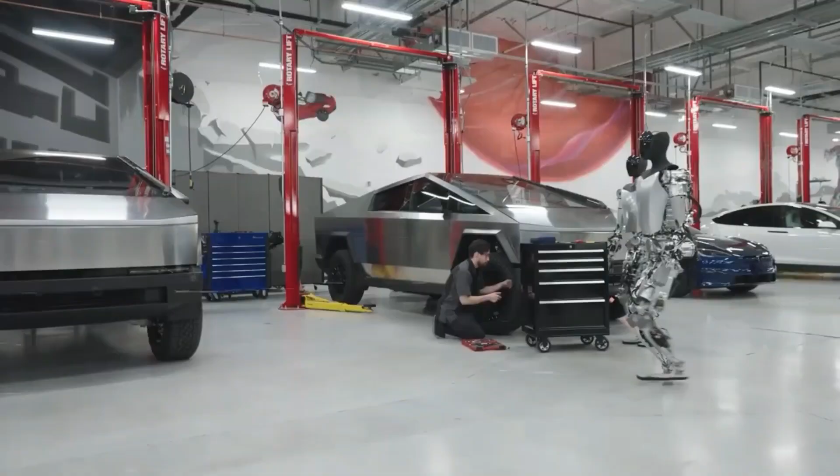But let me just set the stage real quick. You had AI companies dropping the craziest humanoid AI robots that are legit starting to think and learn autonomously. I'm talking Ameca, Optimus, this whole new breed of androids. Then you had big dogs like Boston Dynamics. Oh, and get this, there's even a company that's low-key created a robotic body ready for freaking AGI. It's been that level of crazy, and honestly, it's been wild just trying to keep up with all the major updates and breakthroughs, but don't worry, I got you covered.

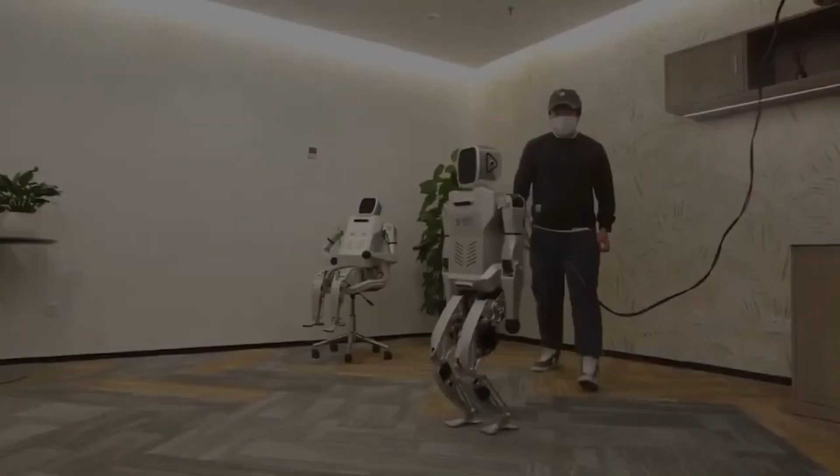In this video, we're gonna take it step by step, going through all the biggest robotics news chronologically from July 2023 until now. So let's just get started.

So Ameca, a groundbreaking robot from Engineered Arts that talks and mimics human expressions and movements, now draws too, making it a fascinating blend of tech and art. This AI robot looks like a human but doesn't have a specific gender or race, with a gray rubber face and hands. It can move its arms, fingers, neck, and face, letting it show emotions and even talk.

Recently, OpenAI and a Norwegian startup called 1X made an exciting announcement about the launch of their first physical robot named Neo, which looks like a futuristic astronaut, can move around, handle things, talk, and sense its surroundings thanks to its arms, legs, cameras, speakers, microphones, and sensors. Ameca and Neo are excellent examples of AI in human-like forms.

They don't just respond to commands, they can also show their intelligence and creativity, like when they draw. Let's examine how they manage to do this.

So first, let's talk about Ameca, one of the most advanced human-shaped robots in the world, representing the forefront of humanoid robotics technology. It is designed specifically as a platform for development into future robotics technologies, such as artificial intelligence and machine learning. One of the most impressive features of Ameca is its realistic human-like appearance and motion.

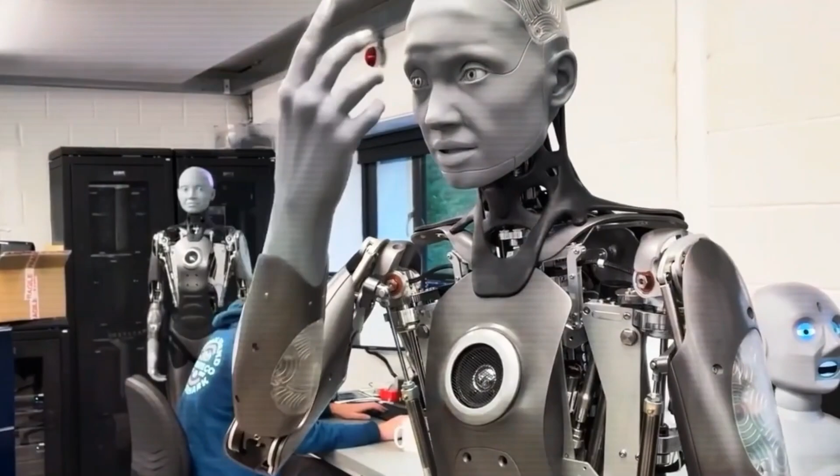Ameca can mimic human expressions such as smiling, frowning, or winking, using 24 motors in its face. It can also move its head, eyes, and mouth to follow and engage with people. It can speak in different languages and accents using text-to-speech synthesis or pre-recorded audio. It can also gesture with its arms and hands using 20 motors in each arm and 12 motors in each hand.

But Ameca is not just a pretty face. It also has a high degree of dexterity and fine motor skills, which enable it to perform tasks that require precision and coordination. For example, Ameca can write with a pen, type on a keyboard, play the piano, or solve a Rubik's Cube. It can also draw with a pencil, which is one of its newest and most amazing skills.

Ameca's drawing ability was developed by Engineered Arts in collaboration with researchers from the University of Bristol and the University of Bath. The project was funded by the Engineering and Physical Sciences Research Council and was presented at the International Conference on Robotics and Automation in May 2023.

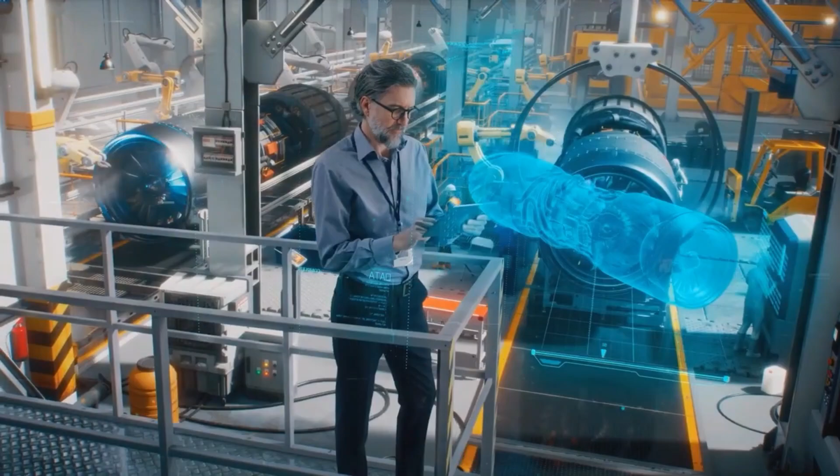The project aimed to use artificial intelligence to make drawing more imaginative and accurate. The researchers used a combination of techniques to achieve this goal, such as generative adversarial networks, style transfer, a method that can change the style of one picture to match another, like making a photo seem like a painting. Inverse kinematics, a technique for determining the movements of a robot arm based on its intended final position, like holding a pencil. Proportional integral derivative controllers, these adjust a motor's speed and force to get a specific result, like drawing a line.

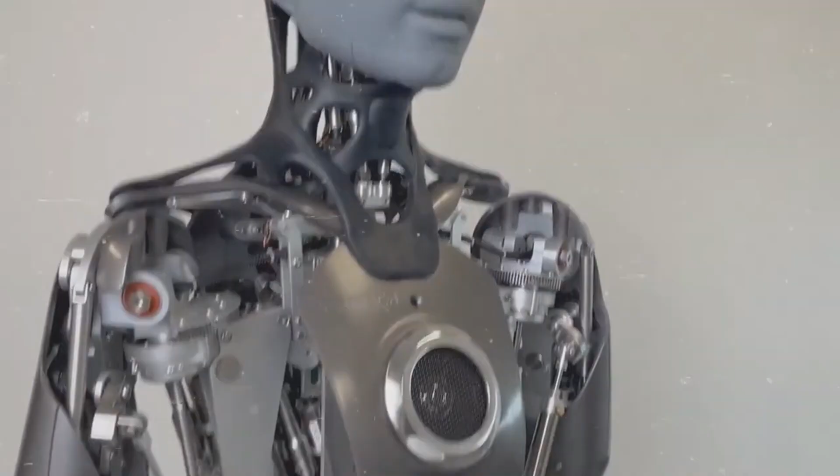Using these methods, Ameca can draw different types of images like portraits, landscapes, animals, and even abstract art. It can also draw pictures based on text descriptions, such as a cat with sunglasses or a fire-breathing dragon. It can even make drawings from its own thoughts by using random data as its input. To draw an image, Ameca first uses a GAN to generate an image from a text prompt or noise. Then, it uses style transfer to apply a desired style to the image, such as sketch, watercolor, or oil painting.

Next, it uses IK to calculate the joint angles of its arm and hand to trace the contours of the image. Finally, it uses PID controllers to control the motors of its arm and hand to draw the image on paper. The result is stunning. Ameca can draw images that are not only realistic but also expressive, diverse, and original.

Now, most of us are familiar with OpenAI because of ChatGPT. However, OpenAI isn't just about making software, they also focus on hardware. And that's why they have developed Neo, their first physical robot.

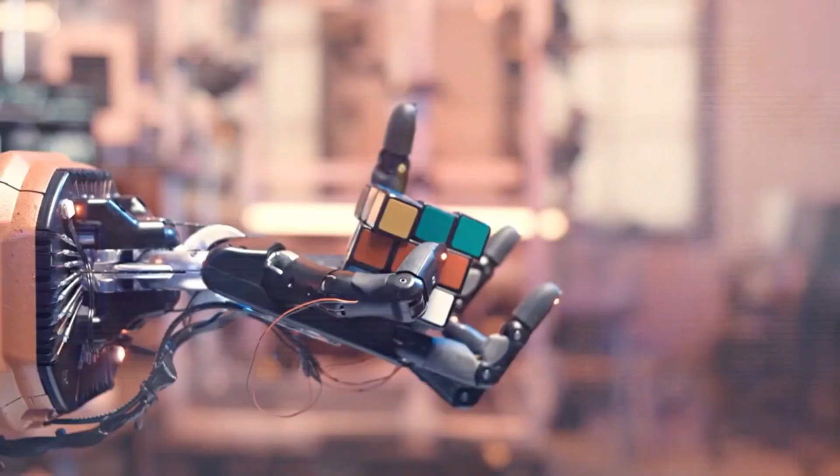Neo is a human-like robot powered by OpenAI's systems such as GPT-4, DALL-E, Codex, and Clip. It can learn, understand commands, and even create images or code. Designed to look like a future astronaut, it can move, handle objects, and communicate. OpenAI plans to use Neo as a testbed for their vision of artificial general intelligence, AGI, which is the ultimate goal of creating AI that can perform any task that a human can.

It was unveiled in July 2023 at the Neo Accelerator, a startup accelerator founded by Silicon Valley investor Ali Partovi, which partnered with OpenAI and Microsoft to provide free software and mentorship for budding AI companies. It was one of the highlights of the event, where it demonstrated some of its abilities and tasks.

Neo is one of the most innovative and ambitious robots in the world, representing OpenAI's vision for the future of AI and robotics. It has a customizable design and latest tech features. Its parts can be changed based on the task or place. For instance, it can swap its legs for wheels, or its gripping tools depending on what's needed. It can also interact with its parts wirelessly through Bluetooth or Wi-Fi.

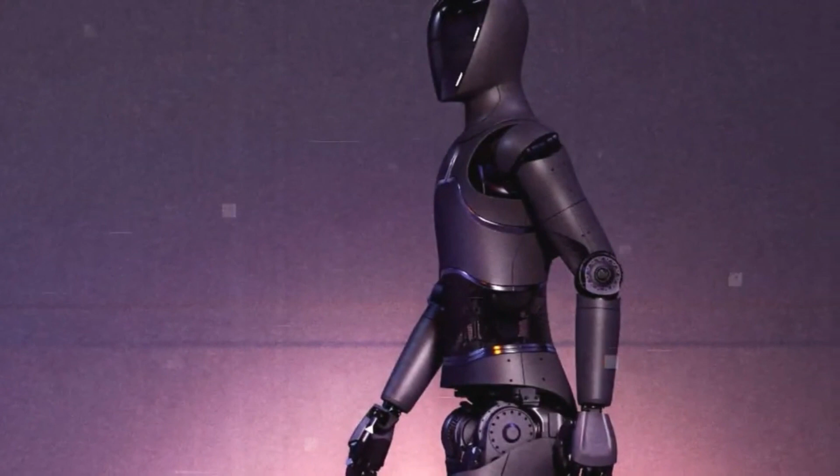Furthermore, Neo uses OpenAI's AI systems like GPT-4, DALL-E, Codex, and Clip that enable it to understand and respond to spoken commands, create realistic images from text, write functional code from spoken prompts, and learn from text-based guidance to identify objects, faces, and feelings. With these abilities, Neo can perform a variety of tasks, such as drawing, playing games, and solving puzzles. For instance, it can draw pictures, learn and play games like chess, and solve logical puzzles like Sudoku.

Ameca and Neo are both humanoid robots that can draw and do amazing things using artificial intelligence, but they are also very different in many ways. They represent different approaches and possibilities in the field of robotics and AI.

Ameca is designed to be human-like and interacts with people using normal language and movements. Its art comes from turning words or noise into images, which it then draws on paper. Although Ameca's artwork is unique and expressive, the quality depends on how well the images are generated and traced.

On the other hand, Neo is designed to be versatile, able to do any human task using artificial intelligence. It makes art by transforming words or noise into code, which it then runs on its internal computer or screen. While Neo's drawings are accurate and realistic, they're limited by the complexity of the code and the display resolution.

Both robots are remarkable but have different goals. Ameca aims to express itself through art, valuing creativity and diversity. Meanwhile, Neo wants to learn and improve its abilities, prioritizing intelligence and efficiency.

While both robots are impressive, they bring up societal questions and challenges. AI robots like Ameca and Neo can bring lots of changes to society, some good and some bad. They can make learning and entertainment more exciting, help us with tough or boring jobs, and spark new creative ideas.

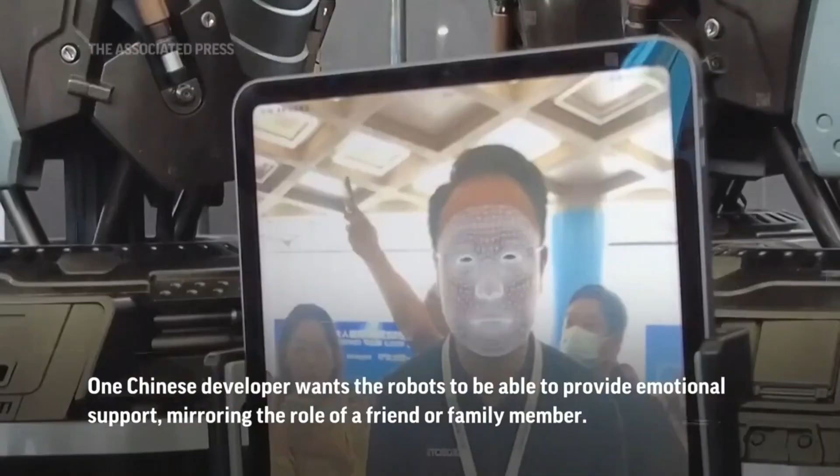First, let me introduce you to EX Robots, a company that specializes in making robots with real-time facial replication. That means they can copy your expressions and emotions in a blink of an eye. The CEO of EX Robots, Li Boyang, demonstrated this by making faces at a robot, who then mirrored them back at him.

It was like watching a weird game of Simon Says, but with more wrinkles and less fun. EX Robots claims that their robots can interact naturally with humans, thanks to AI and language models. They say they can understand what you say and respond accordingly. But what if I said, "Looking like a melted waxwork there, buddy"? Would they cry oily tears or just serve up some epic robo-repartee? I guess we'll have to wait and see.

The technology behind these lifelike expressions is quite impressive, though. EX Robots uses movable electric units on the robotic faces, which can simulate different muscles and movements. They also have a specialized system for generating expressions, either by using predefined scenarios or by collecting biological data from human faces. So basically, they can steal your smile and use it for themselves. How creepy is that?

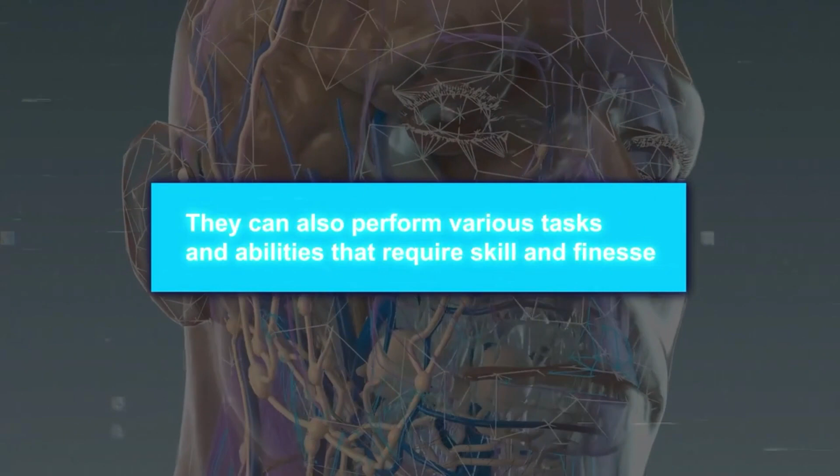But facial expressions are not the only thing these robots can do. They can also perform various tasks and abilities that require skill and finesse. For example, there was a barista robot that could create latte art with precision and flair. It could draw anything from hearts to flowers to pandas on your coffee foam. I have to admit, that's pretty cool.

There were also humanoid robots that could play basketball and dance like pros. They could dribble, shoot, pass, and dunk with ease. They could also groove to the music and execute complex choreographies with grace. They were powered by AI foundation models, which enable them to learn from data and improve their performance over time. They also have increased autonomous decision-making abilities, which means they can adapt to different situations and environments.

These robots aren't just cool toys, they're seriously clever. For instance, there's this adorable panda robot named Yu by Ubtech. If you say, "I'm thirsty," it won't just look cute. It'll actually go get a drink from the fridge for you, even open the bottle and hand it to you.

Then there's Cloud Ginger by Data Robotics. This guy is hooked up to the cloud and runs on Robot GPT, which is a special robot language-making model. What's cool is that Cloud Ginger can groove to traditional Chinese dances and chat with folks in different ways. Plus, if you speak a different language or have a special dialect, no worries. It can switch up and chat right back in your preferred language.

But they are also more than just playthings for those into gadgets and gizmos. They're getting jobs in real places like schools, big meeting spots, fancy hotels, and elderly care facilities. EX Robots even says their robots can do the heavy lifting in different jobs, like cleaning up, keeping an eye on things, delivering stuff, and checking things out.

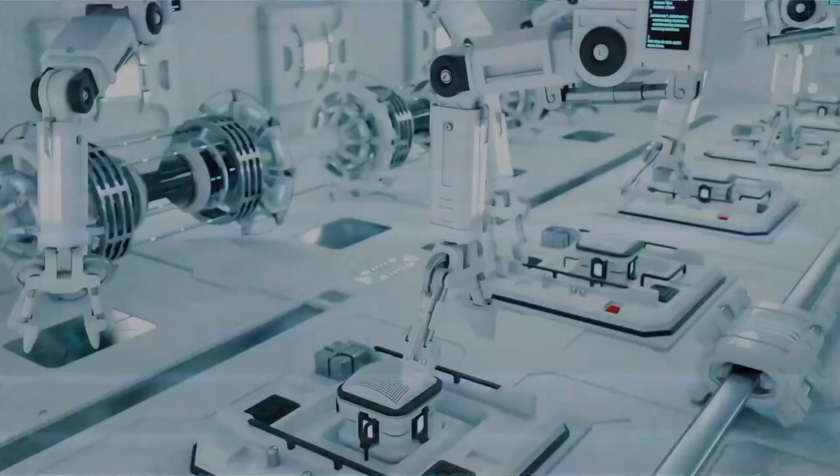Honestly, this is just them getting started. Imagine a future where these robots are everywhere, in factories, on farms, or even chilling in our living rooms. They might just end up being our pals, helping hands, our personal tutors, or even our buddies.

But this also raises some questions and concerns. How will these robots affect our society and economy? How will they impact our jobs and livelihoods? How will they coexist with us in harmony or conflict?

Well, according to China's Vice Minister of Industry and Information Technology, Xu Xiaolan, China is leading the world in the robot industry and has great potential for growth and innovation. He said that China aims to create a robot ecosystem that integrates manufacturing, service, education, medical care, entertainment, and other fields. He also said that China will promote the development of intelligent robots that are safe, reliable, adaptable, collaborative, and ethical. Sounds good on paper, but I'm not so sure about reality.

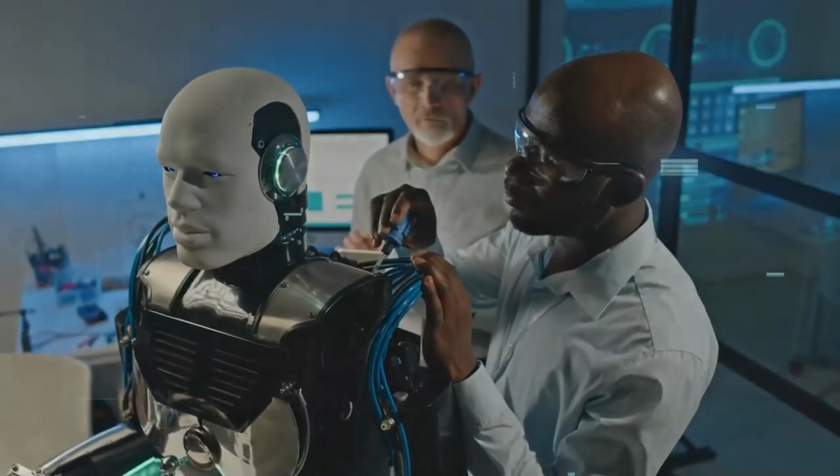I mean, don't get me wrong, I think these robots are amazing feats of engineering and creativity, but I also think they are kind of scary and unsettling. I mean, do we really need robots that look and act like us? Do we really want robots that can do everything we can do? Do we really trust robots that can think for themselves?

One of the most controversial issues in the debate about AI is whether AI can ever be conscious. And if so, does that mean they deserve rights as humans do? I put this question out to you all earlier and you guys had some mixed feelings about it.

Some say no way, AIs are just fancy machines. They don't really feel or think, they just mimic us. Because they're not built like us, they can't experience things as we do. They're just tools. Others believe that if an AI gets advanced enough, it might just have feelings and self-awareness. It doesn't matter if they're made of silicon or cells. It's about how complex and organized they are. But hey, I'm still curious.

Ameca is the most advanced human-like robot in the world, created by a British company named Engineered Arts. In this video, I'll share with you the newest updates about this robot and what it predicts for the future of people. Later in the video, we'll also discuss Microsoft's latest AI gadget, which is an AI backpack that can see and hear everything just like you do, and it acts as your personal companion.

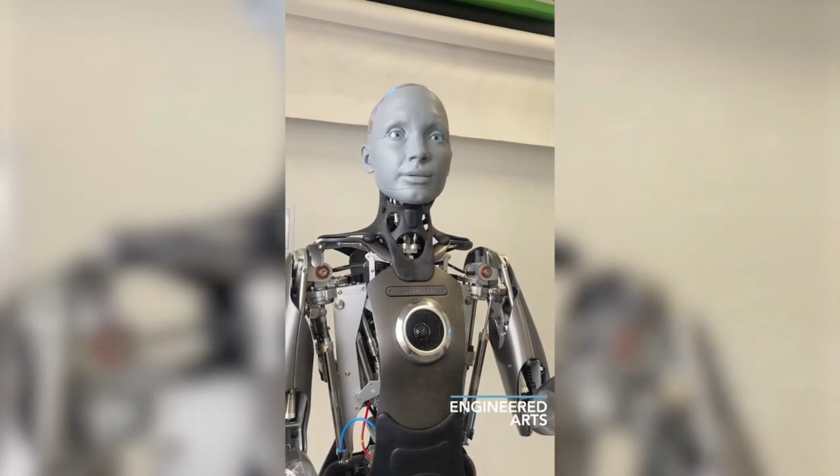The robot believes that in 100 years, people will be living better lives. We'll have made great strides towards sustainability and equality. And we'll have new technologies that make life easier and more fun, while also creating new technologies that make our lives easier and more enjoyable.

We might even have traveled to other planets, venturing beyond the boundaries of Earth to explore other worlds. It also thinks a future where humans and robots live together would be great. We could learn from each other, work as a team to fix issues, and make a better future for everyone. And it also believes that robots should also have rights and be treated well, just like people.

Now, this idea of giving robots equal rights is something that makes me uneasy, but it seems like we're getting closer to making this unusual concept a reality.

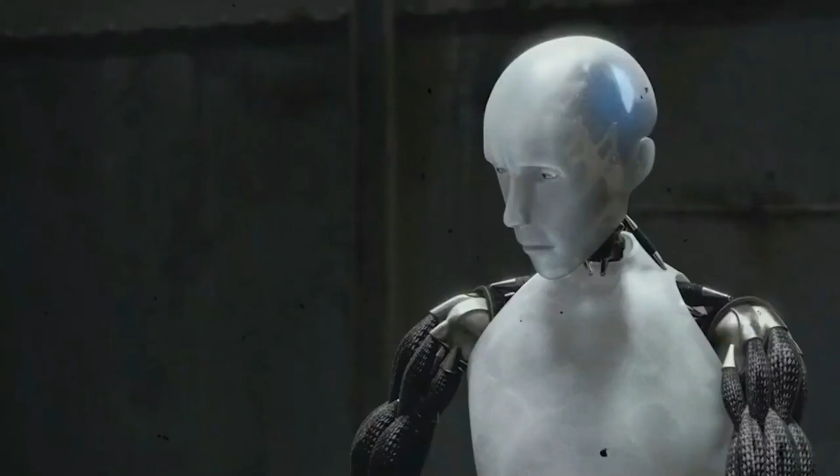You might be curious about how Ameca can act like it has human thoughts and feelings. Ameca runs on an AI system that uses something called generative models. These models help it understand and speak our language, and even control its facial expressions and movements. What does this action signify? It's similar to GPT-4, one of the most advanced AI models out there.

However, these generative models aren't perfect. They can make mistakes, and their behavior can be shaped by the data they've been trained on. They don't actually understand or reason, they just process information to act like they do.

So does Ameca truly think and feel like us? Not really, but it does have some skills that make it appear more human. For instance, it can pause before answering a question, which makes it seem like it's thinking. It can also show signs of emotion and connect with people in a way that feels genuine. But these impressions are not necessarily accurate or reliable. They are based on our perception and interpretation of Ameca's behavior and appearance.

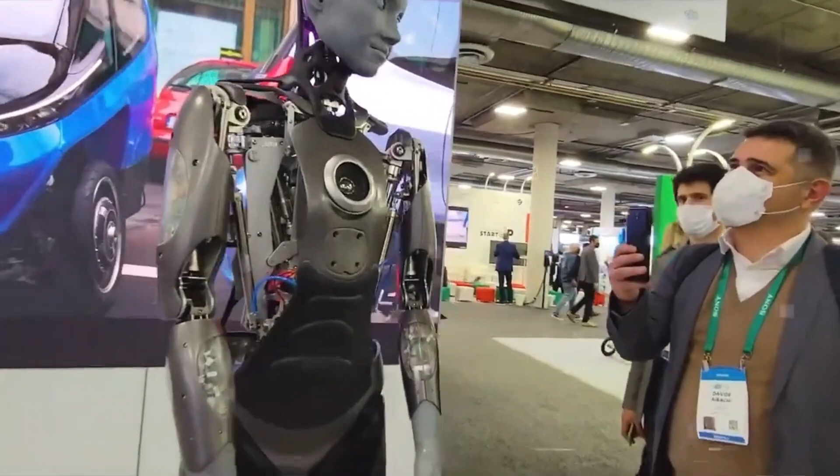We tend to anthropomorphize machines that look or act like humans because we are wired to do so by evolution. We project our own feelings and expectations onto them because we want to relate to them. This is why some people love Ameca and find it optimistic and inspiring, while others hate it and find it creepy or woke. The public reactions to Ameca's statements have been mixed and polarized. Some think it's hopeful and are impressed by what it can do, like helping to teach or care for older people.

Others think it's too optimistic and worry about it doing jobs that need a lot of patience, like looking after people with dementia. The discussions about Ameca are part of a bigger conversation about the future of artificial intelligence and how it will affect us.

As AI gets more advanced, we have to think about both the good and bad things that could happen. We need to make sure AI is safe and helpful for everyone. This means people from all areas like government, businesses, and research need to talk and work together. We need to create rules that make sure AI is both innovative and responsible.

So, Ameca isn't just a robot. It's a glimpse into what the future of AI could be like. That future could be amazing but also risky, and it's something we all need to help shape.

Blending the realms of space travel and robotics, Ji-hee Kim introduces an innovative creation: Laika, an AI-powered, realistic robot companion designed for human interaction. Ji-hee Kim is a Korean engineer and artist who is passionate about creating human-robot interactions. She was inspired by the story of Laika, the first animal to orbit the Earth in 1957.

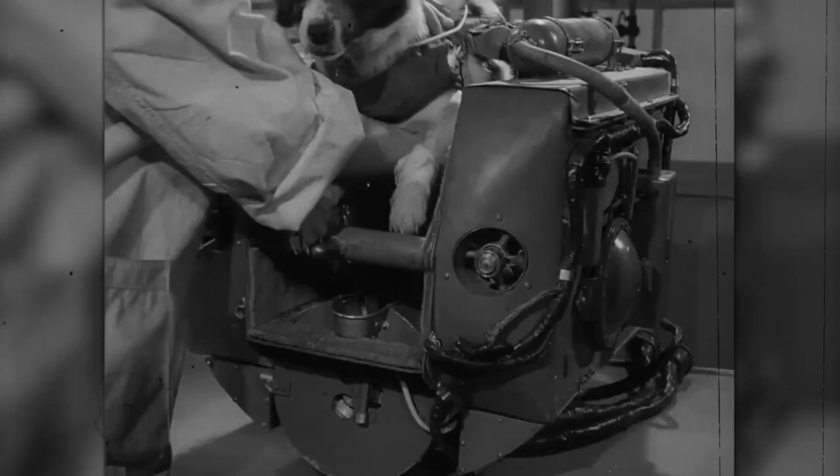Laika was a stray dog from the streets of Moscow, who was sent to space by the Soviet Union as part of the Sputnik 2 mission. Unfortunately, the dog did not survive the journey, and her fate sparked a lot of controversy and debate about the ethics of animal testing in space.

And Laika is not just a toy or a gadget, but almost a living being that can interact with humans and respond to their needs and emotions. When you first see it, you'll be struck by its realistic, almost natural look.

Ji-hee Kim aimed to make a robot dog that fits right into the natural world, avoiding a too robotic appearance. To achieve this, she skillfully combined 3D printing with soft materials for a flexible and smooth body. She even added fur and whiskers for that extra touch of realism.

Underneath, Laika's titanium skeleton gives it strength and durability while keeping it light and nimble. The robot dog can move its head, ears, tail, and legs in ways that seem quite natural, all thanks to its advanced joint movements and sensors.

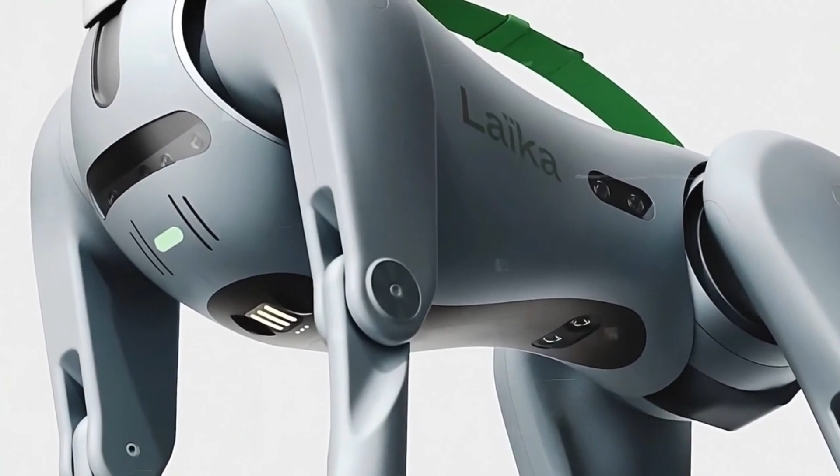Laika comes loaded with an array of sensors to understand and engage with its environment. It's equipped with depth cameras, thermal imaging, microphones, speakers, and touch sensors, letting it see, hear, feel, and talk to humans and other robots. Another cool feature is Laika's ability to check on astronauts' health and mood, using its ECG sensors, which track heart rate and stress levels.

If Laika senses someone is feeling down or alone, it can show affection by wagging its tail, licking, or cuddling. And when it detects happiness or excitement, it might bark, jump around, or play.

And this robot isn't just a space companion, it's also a handy helper for astronauts. It's designed to do a lot of different jobs that help out the crew during their space missions. With its cameras and sensors, Laika can scout the area and gather important data. It's got this flexible handle on its back, so it can carry tools and equipment too.

Plus, it can talk to ground control and other robots through its speakers and microphones, and even connect to the internet to pull up information on its head-mounted screen.

One of the coolest things about Laika is how it works with these special mixed reality glasses. Ji-hee Kim created it to work perfectly with these glasses, which show holograms and virtual images in the real world. When astronauts wear these glasses, they can interact with Laika in a way that feels more real.

They also get to see extra info this robot provides, like maps, weather updates, and important alerts. These glasses make teaming up with Laika and talking to ground control much better. They're even useful for training, as they can simulate different scenarios for astronauts to practice.

Essentially, Laika is a groundbreaking robot dog with the potential to really change space travel. It could help astronauts feel less stressed, lonely, or bored. By assisting with their tasks, Laika could also boost their work efficiency.

It's not just about space, though. Laika's experiences could teach and inspire people back on Earth. It could even be used in different situations, like helping out in disasters, search and rescue operations, or as a therapy aid. Laika honors the first animal in space, showcasing human creativity and the drive to explore. This robot dog represents a new chapter in supporting space travelers, potentially transforming our experience of space travel.

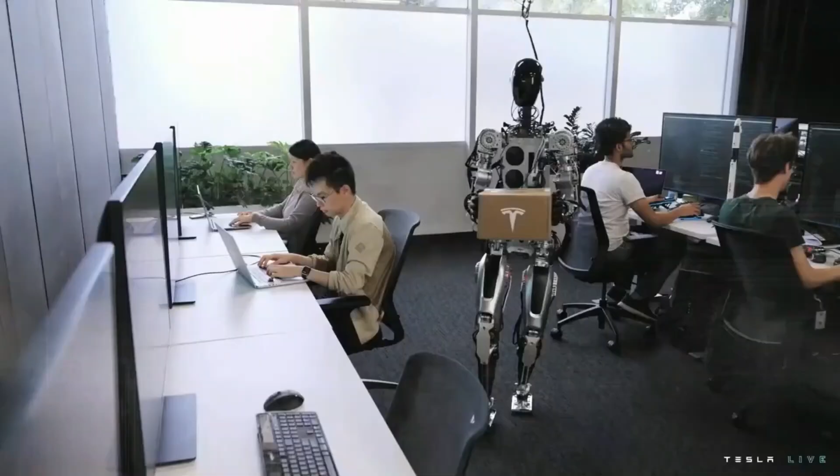But there's still a lot we don't know about the final version of Optimus, including how it will manage balance and control, possibly using technology from Tesla's autopilot. We're also curious about its ability to interact with humans and adapt to new environments and tasks. Finally, how Optimus will communicate with other robots or devices remains an intriguing question.

But before diving too deep, let's focus on some of the key technical features that make the Optimus Gen 2 really stand out. A major highlight of this robot is its hands. They are built to move in all directions thanks to something called 11 degrees of freedom. This flexibility lets the hands do precise work, like picking up items or using tools.

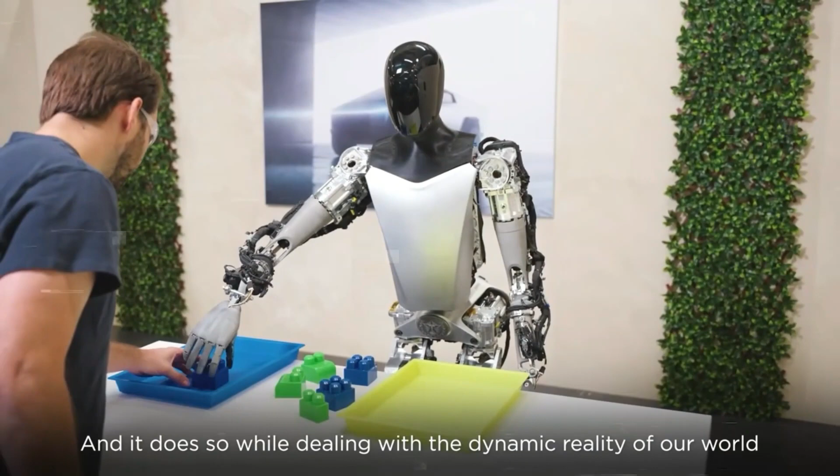What's even more impressive is that these hands can sense touch. They have a special skin-like covering that can bend and stretch without damage. This covering is filled with sensors that can feel pressure, temperature, humidity, and even vibrations, which makes the robot's hands incredibly sensitive and versatile. The new Optimus Gen 2 robot is really advanced with its tactile sensing. This means it can feel things around it in a way no other robot can, understanding if something is hot, cold, heavy, light, smooth, or rough. This helps it interact in a more human-like way.

What's also impressive is how fast it can walk, around 4 miles per hour, and it can move its head and neck by itself, which is great for looking around or talking. Elon Musk says Optimus Gen 2 is smart enough to learn from what happens around it. It can figure out how to use new things, solve problems, or even learn how to chat with new people or animals.

But what about the applications of Optimus Gen 2? How will this robot benefit humanity? Well, there are a bunch of ways this robot could be really useful in different areas.

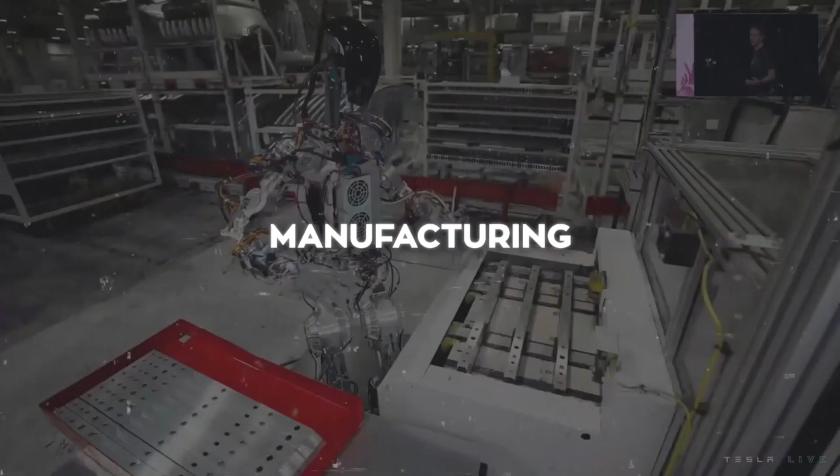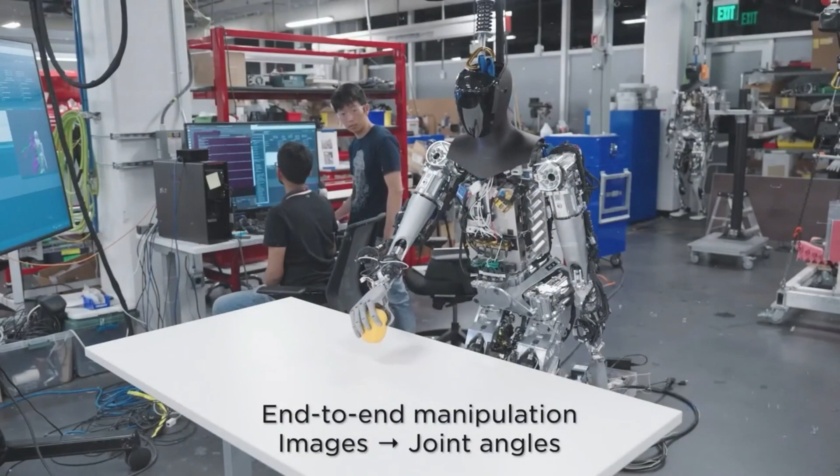First, in manufacturing, think of Optimus as a helping hand in factories. It could do stuff like lifting heavy things, putting parts together, or checking if things are made right. Basically, it can handle the tough or boring jobs. Then there's construction work. Optimus could be a game changer on building sites, doing heavy lifting, digging, or clearing up messes. In our homes or offices, Optimus could make life easier by doing chores or providing services. Imagine it bringing you stuff, cleaning up, or even giving foot massages.

In schools or universities, Optimus could step in as a teacher. It could explain difficult topics, show cool experiments, or answer students' questions. For fun, Optimus could be an entertainer in parks or theaters. It could play games, crack jokes, or even sing.

Hey man, I got some valuables in there. Can you just be careful? Yeah, man. No problem. Oh, dude, come on, man.

LG, a well-known electronics company, is all set to amaze everyone at CES 2024 with their latest creation, a small, friendly robot designed to make life at home easier and more enjoyable. This announcement, made just a few hours ago, is already creating quite a buzz.

This adorable robot from LG stands about a foot tall and walks on 2 legs. It's not just for show. This little helper is packed with advanced technology to take care of your house. It can wander around your home, checking for any issues, keeping an eye on your pets, and even understanding how you feel to make your day better.

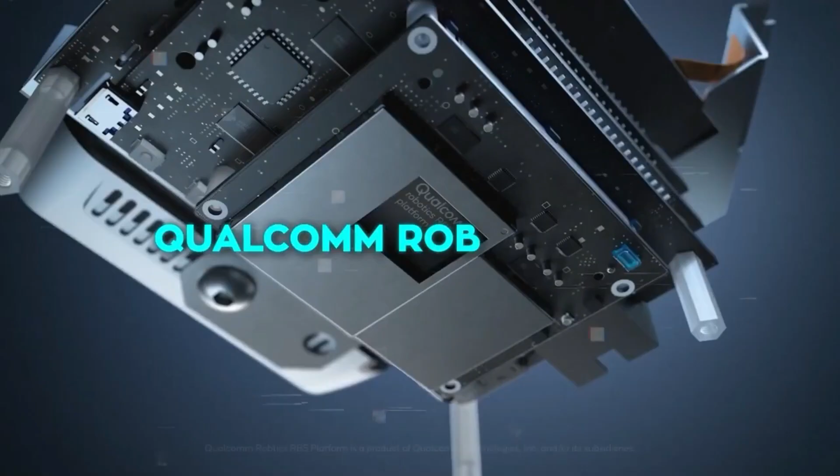Thanks to the Qualcomm Robotics RB5 platform, the robot gets smarter over time, learning about your likes and habits to become an even better companion. LG refers to this robot as a moving smart home hub, aimed at reducing the chores you have to do around the house. And it seems to do just that.

Scheduled to be showcased at CES 2024 next week, the robot can connect with all the smart devices in your house. It can turn devices off when they're not needed or when you're not home. Plus, it can patrol your home, checking if windows are shut or if lights are left on, and alert you about it.

When you're out, the robot isn't just sitting idle. It can keep an eye on your pets and even let you watch live video feeds to see what your furry friends are up to when you're away. It's also smart enough to monitor your home's temperature, humidity, and air quality, alerting you if something isn't right.

But the robot's abilities don't end there. When you come home, it greets you at the door and can figure out how you're feeling by looking at your face and listening to your voice. Depending on your mood, it can play music or sounds to cheer you up. And if you tend to forget things like medication schedules, the robot can help remind you.

To do all this, the robot is equipped with a camera, speaker, and various sensors. These help it understand what's happening in your home, from air quality to potential problems. It also uses voice and image recognition software, along with the ability to process natural language, to identify and respond to issues as they arise.

This robot is part of LG's bigger plan to introduce a range of smart home products that aim to make your life easier, fitting into their vision of a zero-labor home. Whether or not people will be comfortable with a robot that follows them and their pets around the house all day is yet to be seen.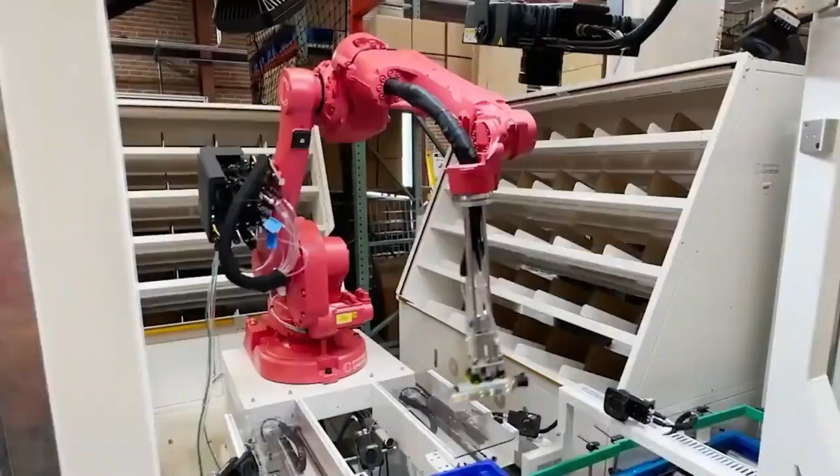The essence of their technology lies in providing robots with an understanding of their environment, allowing them to perform tasks such as picking up, moving, and sorting items with an unprecedented level of sophistication. These robots, equipped with the ability to comprehend English, offer the possibility of human-like interaction, enabling operators to communicate with them as if they were conversing with a chatbot like ChatGPT.

At the heart of Covariant's innovation is the integration of sensory data from cameras and other sensors with the extensive textual data similar to that used to train chatbots. This combination grants the robots a comprehensive understanding of their surroundings, empowering them to handle objects and situations they have not been explicitly programmed to deal with.

For instance, a covariant robot can identify and manipulate a banana by understanding instructions given in English, even if it has never encountered a banana before. This capability is a significant departure from traditional robotics, where machines perform a limited set of tasks in a highly controlled environment.

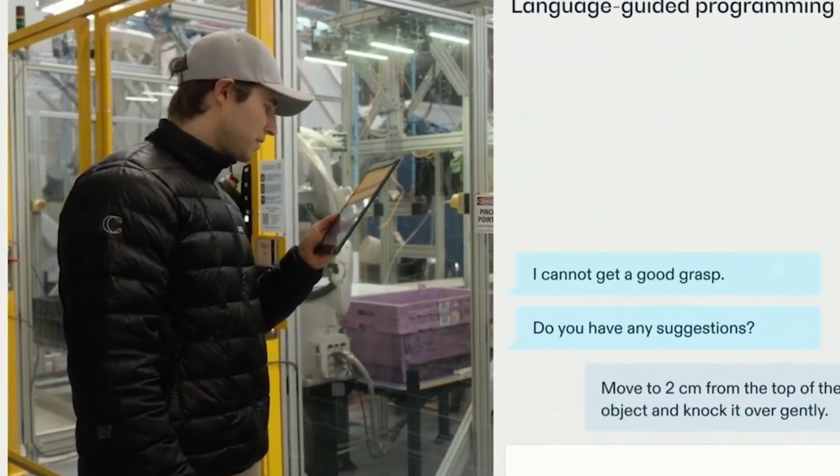Despite the promising advancements, Covariant's technology is not infallible. The robots occasionally make errors, such as misunderstanding instructions or dropping objects. These shortcomings highlight the challenges inherent in applying AI to physical tasks, where the complexity of the real world introduces variables that are difficult to anticipate and manage.

Nonetheless, Covariant's work represents a critical step forward in the quest to create more intelligent, adaptable robots capable of operating in diverse environments, from warehouses to manufacturing plants and potentially even in autonomous vehicles.

The foundation of Covariant's technology is built on neural networks, a form of AI inspired by the human brain's structure. These networks learn to recognize patterns and make decisions based on the analysis of large data sets. This learning process is similar to the development of digital AI applications, such as chatbots and image generators, which understand or create content by digesting vast amounts of information from the internet.

By applying these principles to robotics, Covariant is enabling machines to learn from both digital data and sensory input from the physical world, blurring the lines between the digital and physical realms.

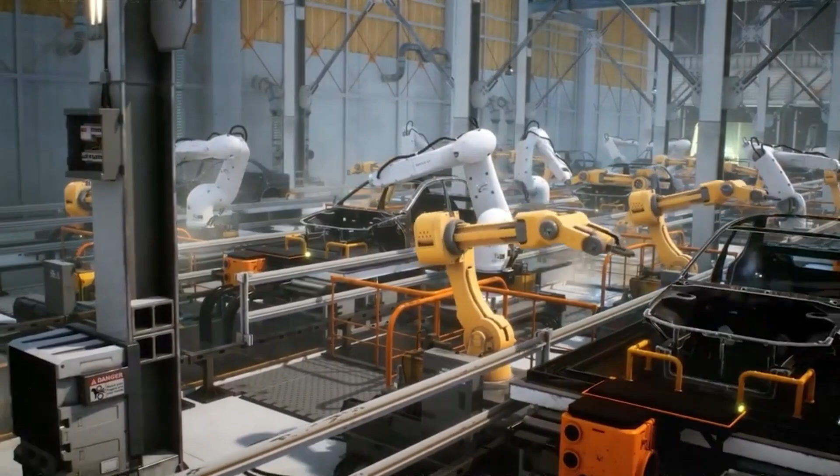Covariant's ambitious project is backed by substantial financial support, with $222 million in funding, underscoring the industry's confidence in their approach. The company's focus on developing software rather than physical robots themselves allows for a versatile application of their technology across various sectors and types of robotic systems. This strategy aims to pave the way for broader adoption and innovation in the field of robotics, making robots more accessible and useful in a wide range of applications.

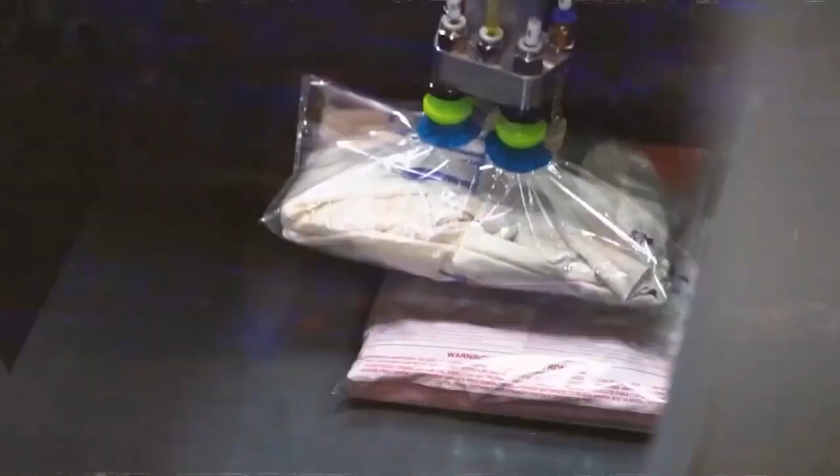The potential impact of Covariant's technology is vast, promising to transform how robots are deployed in numerous settings. By making robots more adaptable and capable of understanding and interacting with their environment in complex ways, Covariant is contributing to a future where machines can take on more sophisticated tasks, work alongside humans more effectively, and adapt to new challenges as they arise. This vision aligns with the broader trend of AI integration into our daily lives, where technology not only automates tasks, but also enhances human capabilities and experiences.

Covariant's work also raises important questions about the future of work and the role of robots in society. As robots become more capable and versatile, they may assume responsibilities currently held by humans, leading to shifts in the labor market and necessitating discussions about retraining and education. Furthermore, the development of intelligent robots highlights ethical considerations, such as ensuring safety and managing the potential for AI systems to act in unpredictable ways.

Covariant's efforts to bring AI technology from the digital world into the physical domain through robotics represents a significant leap forward in the field. By combining sensory data with the textual data used to train AI systems like ChatGPT, Covariant is enabling robots to understand and interact with their environment in ways that were previously unimaginable. Although challenges remain, the potential for this technology to revolutionize industries, enhance human-robot collaboration, and create new opportunities is immense.

Guys, this is finally happening. There's a new reality where just thinking can make you play games, move stuff on a screen, and even control computers. This isn't some far-off dream.

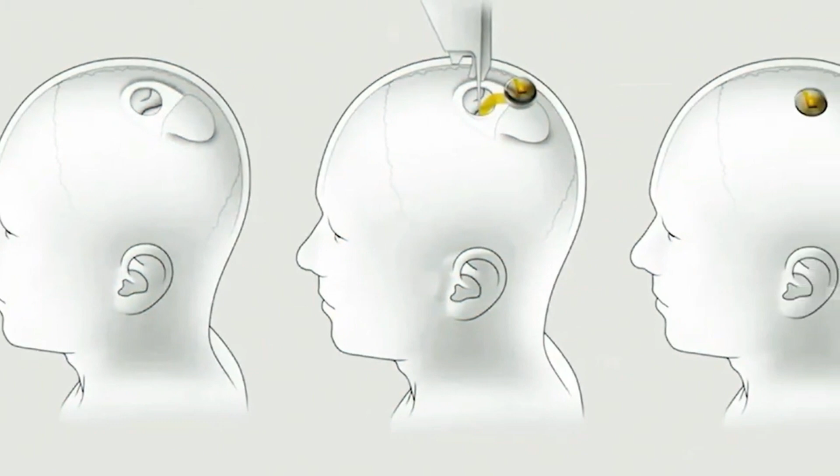Musk previously mentioned that Arbaugh had been implanted with the Neuralink chip in January, which enabled him to control a computer mouse through thought. According to Arbaugh, the surgery was super easy, and he was discharged from the hospital just a day later without any cognitive impairments.

However, Arbaugh and Musk are quick to remind everyone that this technology is still in its infancy. While Arbaugh's life has significantly improved, allowing him to engage in activities he thought were lost to him, he notes that the journey is far from over. The technology is not perfect, and they've encountered some issues along the way, signaling a long road ahead filled with improvements and enhancements.

Kip Ludwig, a former program director for neural engineering at the U.S. National Institutes of Health, echoed this sentiment. He stated that while what Neuralink has demonstrated is far from a breakthrough, it represents a vital step forward for the patient and the field of neural engineering.

It's still early days for the implant, and both Neuralink and Arbaugh are learning to maximize control and interaction capabilities. However, the fact that Arbaugh can interact with a computer in ways he couldn't before is a positive development.

Adding to the intrigue, Neuralink has been under scrutiny by the U.S. Food and Drug Administration, which found issues with record keeping and quality controls for animal experiments. This came shortly after Neuralink announced it had received clearance to test its brain implants in humans. The company had not responded to inquiries regarding the FDA's findings at the time.

During the live stream, Arbaugh shared his astonishment at the technology, comparing it to using the Force from the Star Wars films to move the cursor on his screen. This intuitive control mechanism has transformed his interaction with technology, making everyday tasks feasible once again.

Musk, on the other hand, has been promoting this demonstration as an example of telepathy, showcasing the potential for humans to control computers purely through thought.

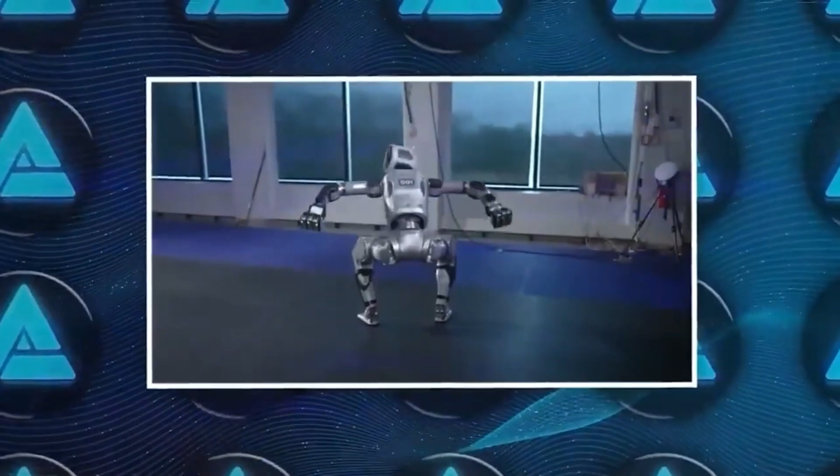The unveiling of this new version was captured in a compelling video. It opens with Atlas lying prone on a set of interlocking gym mats, accompanied only by the soft whirring of its new electric motor. As the camera pans around, the robot begins a seemingly natural motion of bending its legs at the knees. This movement, initially reminiscent of human action, soon crosses into an uncanny valley, evoking a feeling similar to a scene from a Sam Raimi film.

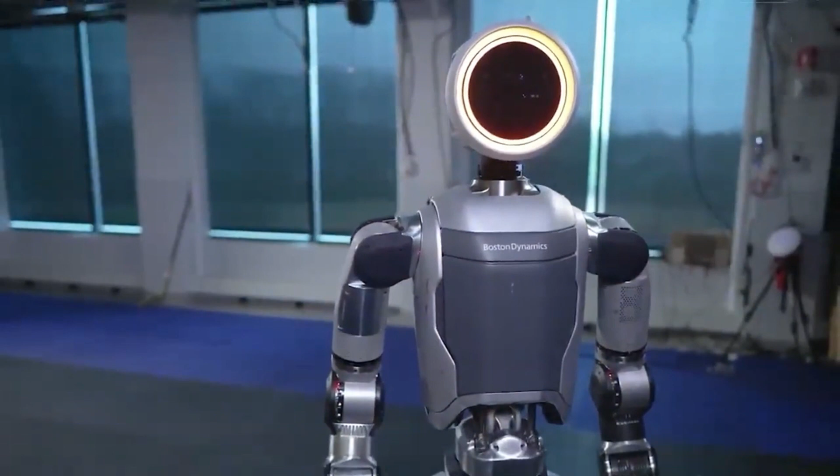This clever maneuver allows Atlas to shift from lying on its back to standing upright, facing away from the camera. It then performs an eerie rotation of its head, followed by its torso, completing a 180-degree turn to face the camera directly. The robot's face, featuring a ring light around a perfectly round screen, then rotates back as Atlas strides off the mats and out of the frame.

This new electric Atlas is not just a technological evolution, but also a symbolic one, mirroring the transformative moment when Bob Dylan famously switched from acoustic to electric guitar.

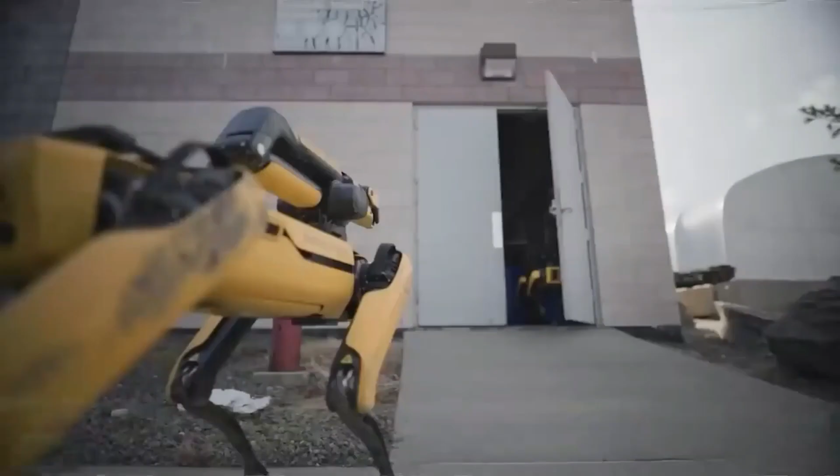The motion of the new Atlas, while still showing some jerky movements, is notably smoother and more fluid compared to many of the commercial humanoids introduced in recent years. This progress illustrates a level of mechanical sophistication that brings to mind the confident and fluid movements of Spot, another robot from Boston Dynamics, suggesting a familial resemblance in their design philosophies.

The physical appearance of Atlas has undergone a radical transformation. Gone are the bulky torso and awkward bowed legs covered in protective plating, replaced by a streamlined, cable-free frame that bears more resemblance to contemporary robots like Agility's Digit and Apptronik's Apollo. This redesign leans towards a softer, more approachable aesthetic, eschewing the intimidating utilitarian look of past models for a friendlier, cartoonish appearance. Despite these substantial changes, Boston Dynamics has chosen to retain the Atlas name, continuing the legacy of its well-known brand into this new commercial phase.

This decision contrasts with previous practices where research names were changed upon commercial release, such as Spot Mini becoming Spot and Handle becoming Stretch. In an interview with TechCrunch, Boston Dynamics CEO Robert Playter discussed the company's strategy and future plans for Atlas. He highlighted that while the branding remains unchanged for now, it might be revisited as the project progresses toward mass production.

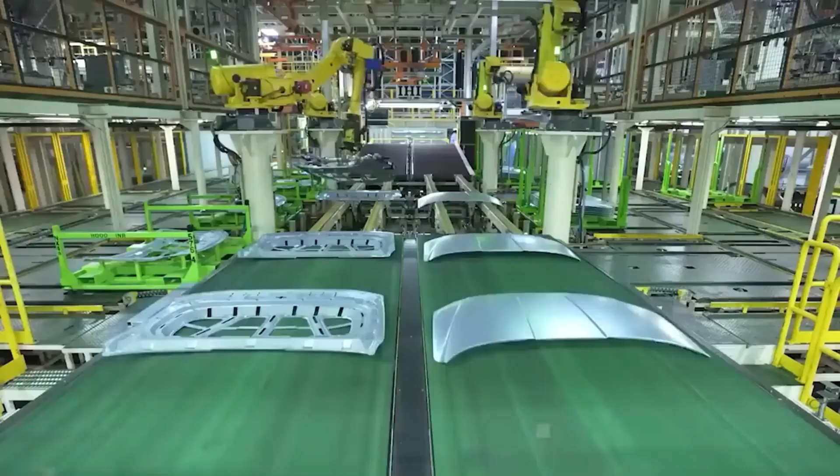The CEO also outlined the company's timeline, which includes starting pilot testing of the electric Atlas at Hyundai facilities early next year, with broader manufacturing goals set for the subsequent years. Playter emphasized the importance of understanding specific use cases to ensure that the investment in robotics is justified by sufficient productivity gains. He revealed that experiments with Hyundai are already underway, indicating a collaborative effort in refining the robot's design and functionality. The flexibility and range of motion in the new Atlas are particularly noteworthy.

According to Playter, the robot incorporates custom high-powered actuators at most joints, which afford it the power and agility of an elite athlete. This capability is not just for show. It has practical implications in industrial applications where robots must perform complex, dynamic tasks reliably.

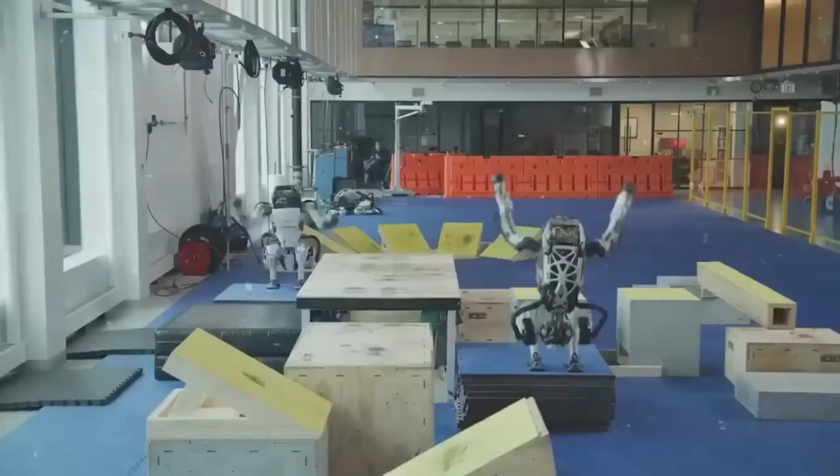Boston Dynamics is known for its viral videos that often highlight the agility and dexterity of its robots in dramatic, even theatrical ways. While these demonstrations are visually impressive and entertaining, they also serve a practical purpose by showcasing the robot's capabilities in scenarios that might occur in real-world settings. For example, the video's depiction of Atlas starting from a prone position and then standing up underscores its ability to recover from falls, an essential feature for maintaining productivity without human intervention in industrial environments.

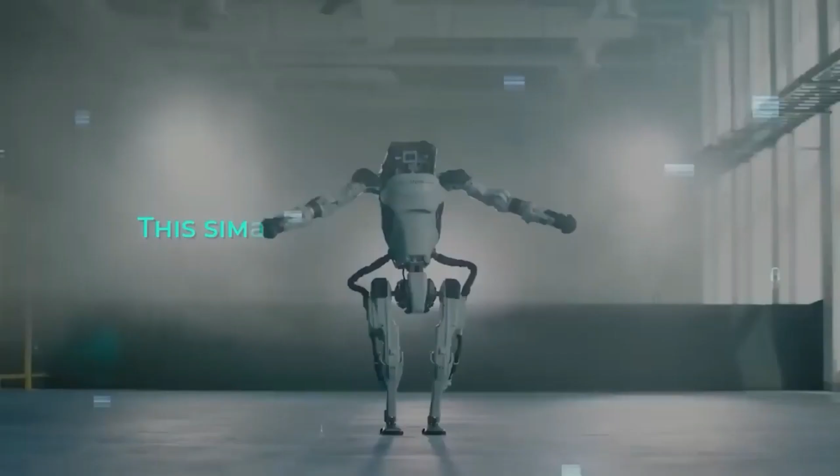The design choices extend to the robot's hands, which now feature 3 fingers instead of the more human-like 4 or 5. This simplification reduces mechanical complexity and enhances durability, crucial for repetitive industrial tasks. The robot's head has also been redesigned, now featuring a large round screen that adds a touch of friendliness and enhances interaction capabilities, which Playter notes will be critical as robots increasingly work alongside humans.

Overall, the new electric Atlas is a big step forward in the world of humanoid robots, combining high-tech features with smart designs to meet the growing needs of businesses and factories. As Boston Dynamics keeps improving this robot, everyone in the industry will be watching closely. They're eager to see how these new features will actually help improve efficiency and productivity in the real world.

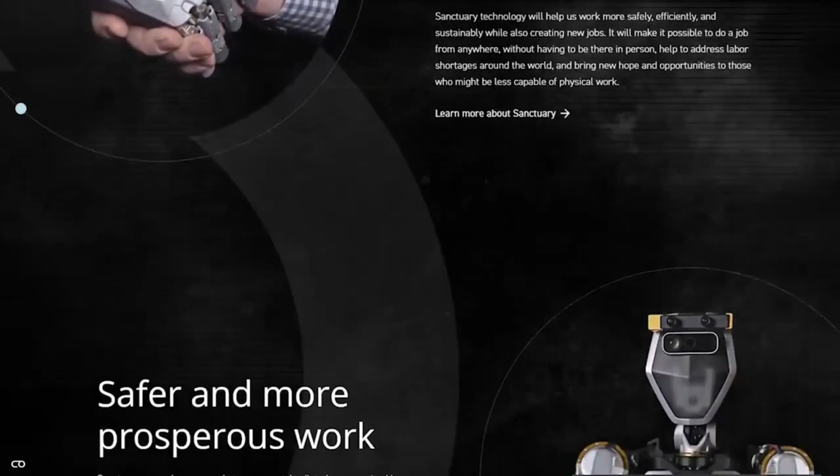So a company called Sanctuary AI just announced a major collaboration with none other than Microsoft, and it's all about accelerating the development of next-gen AI models for general-purpose robots. This is huge. Now, for those not familiar with Sanctuary AI, let me give you a quick rundown. These folks are on an ambitious mission to create the world's first human-like intelligence in general-purpose robots. Yeah, we're talking about artificial general intelligence, or AGI, the holy grail of AI that can truly understand and interact with the world just like us humans.

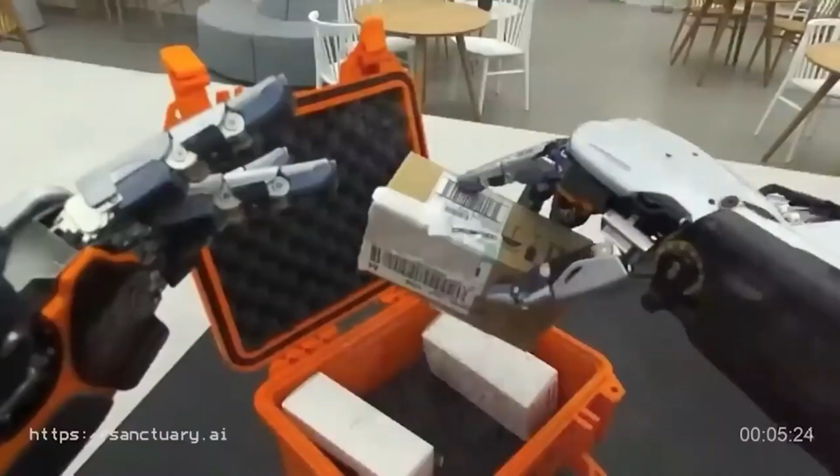But here's the thing, Sanctuary AI isn't just some scrappy startup talking big game. These guys have some serious pedigree. We're talking founders from pioneering companies like D-Wave, the first commercial quantum computing firm, Kindred, which introduced reinforcement learning to production robots, and the Creative Destruction Lab, known for innovative science commercialization. Their team is stacked with veterans from tech titans like Amazon, Microsoft, and SoftBank Robotics. In other words, these folks have been at the forefront of some of the most groundbreaking innovations in AI, robotics, and computing. So when they make bold claims about pushing the boundaries of AGI, you can't help but take them seriously.

So what exactly does this collaboration with Microsoft entail? Well, it's all about harnessing the power of Microsoft's Azure cloud to supercharge the development of what Sanctuary AI calls large behavior models, or LBMs. Think of these as the next evolution beyond large language models like GPT, AI systems designed to learn from and understand real-world experiences and interactions.

By leveraging Azure's massive computing resources for training, inference, networking, and storage, Sanctuary AI can turbocharge their efforts in developing these cutting-edge LBMs, which are critical stepping stones on the path to achieving AGI.

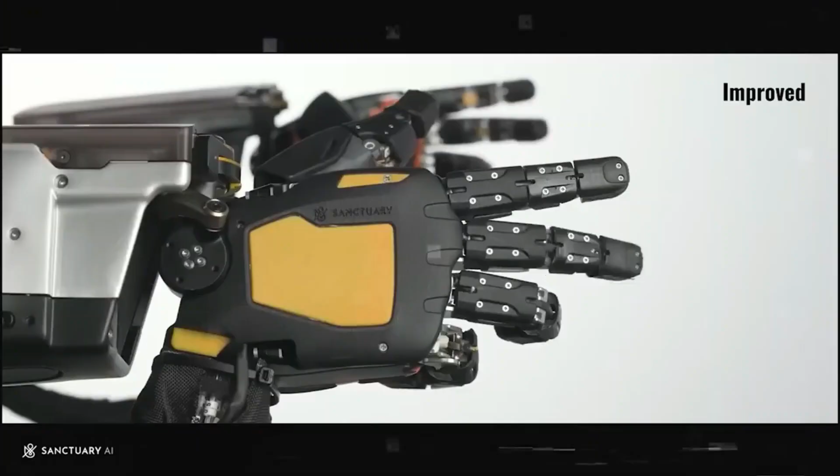Just a few weeks ago, Sanctuary AI unveiled the 7th generation of their flagship robot, Phoenix, and the upgrades and improvements they've packed into this latest iteration are nothing short of mind-blowing. We're talking increased uptime, enhanced visual perception, improved tactile sensing, and an expanded range of human-like motion in the wrists, hands, and elbows. This thing is designed to mimic the dexterity and range of motion of an actual human, which is just insane when you think about it.

And here's the cool part: Sanctuary AI has achieved all of these advancements in just 11 months since their 6th Gen Phoenix robot, which was one of Time's best inventions of 2023. They've been moving forward really fast, and it's almost hard to believe.

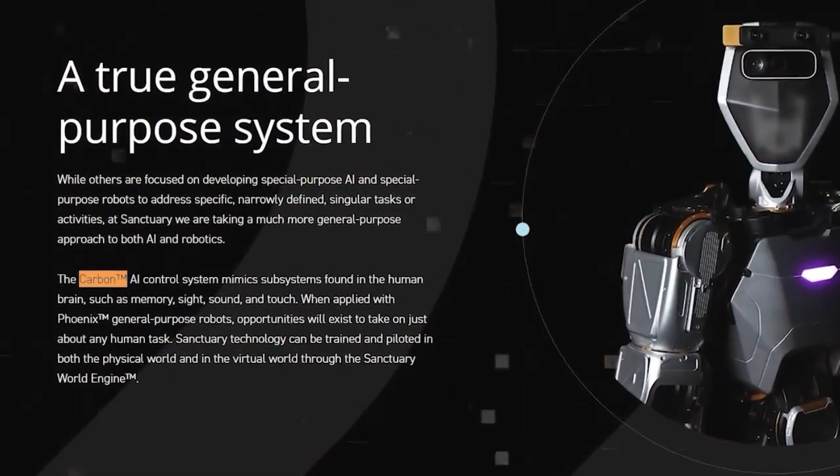According to Sanctuary AI's CEO, Geordie Rose, this 7th Gen Phoenix is one of the most sophisticated human behavioral data capture technologies available today. Essentially, it's providing their Carbon AI control system with some of the highest quality, highest fidelity training data out there, which is critical for developing those advanced LBMs and pushing towards AGI.

But perhaps the most mind-blowing stat of all is that the time it takes to automate new tasks has been slashed from weeks to less than 24 hours. That's a 50x increase in automation speed, marking a pivotal moment in the capability of autonomous systems. Just let that sink in for a second, automating complex tasks in under a day. The potential applications across industries like manufacturing, logistics, and more are staggering.

Now, Sanctuary AI is making some seriously bold claims here, stating that this 7th Gen system is the closest analog to a human of any available robot today. That's a hefty assertion, no doubt, but coming from a team with the pedigree and track record that these folks have, you can't just dismiss it out of hand.

Of course, with any groundbreaking technology, there are always ethical considerations and potential risks to weigh. The development of advanced AI and robotics is no exception, with concerns around safety, transparency, unintended consequences, and the impact on human labor looming large. To their credit, Sanctuary AI seems acutely aware of these issues. They've stressed a commitment to responsible development and addressing labor challenges in a way that augments human workers, not replaces them. The name Sanctuary itself is meant to convey a controlled, secure environment for nurturing AI responsibly before commercial deployment.

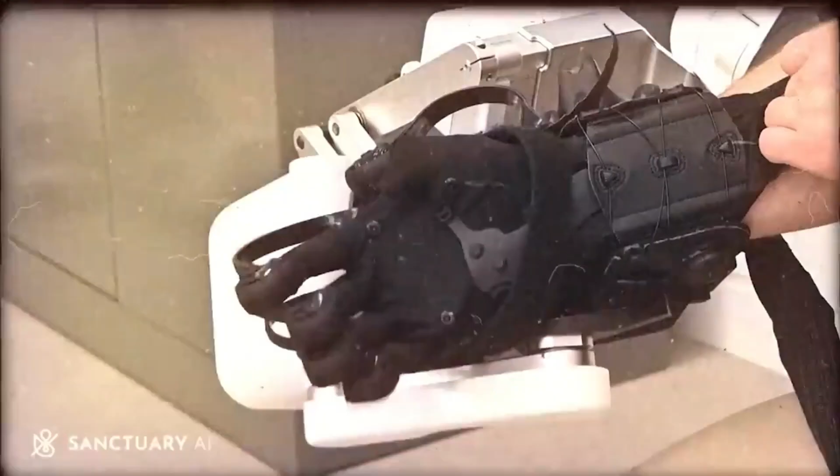Make no mistake, the road ahead is sure to be filled with immense challenges, both technical and ethical. But if companies like Sanctuary AI and their all-star teams can continue this blistering pace of innovation while keeping responsible development at the forefront, we may just witness some truly mind-bending breakthroughs in the coming years. The age of ubiquitous, multi-purpose robotic assistants powered by human-like artificial intelligence is on the horizon, and with visionary pioneers and powerful partnerships like this one leading the charge, that future might be a lot closer than any of us could have imagined.

So Unitree just dropped the trailer for their new Unitree G1 humanoid robot, and this thing is mind-blowing. The flexibility, proficiency, and overall capabilities of this robot are really something else. I'm going to explain and show you exactly why this robot is such a game changer.

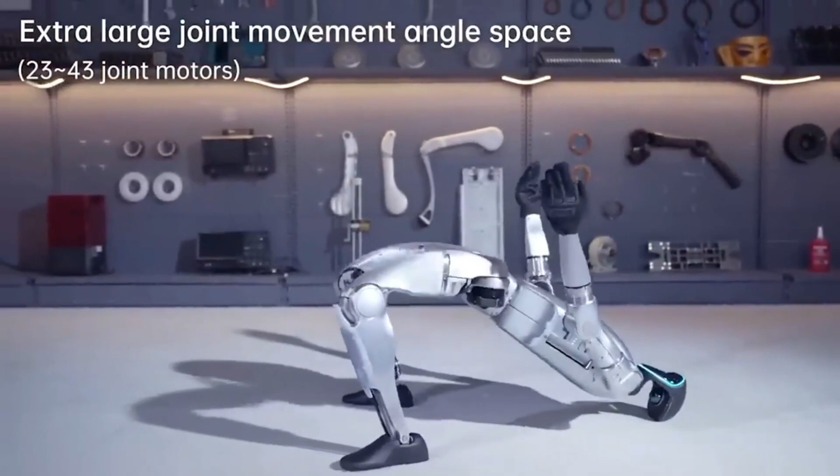Alright, so there's a lot to unpack here, and this robot is genuinely revolutionary. First off, you might have noticed that it looks kind of similar to Boston Dynamics' recently unveiled Atlas robot. Now, I don't think Unitree managed to create this robot in just the 3 weeks since that trailer came out. Something like this takes a long time to develop. But what it does show is that Unitree is evolving faster than a lot of people expected, and they're delivering some seriously impressive tech at a relatively affordable price point. The G1 starts at just $16,000, which is cheaper than any other humanoid robot with these kinds of capabilities.

One of the things that really stood out to me in this demo was the insane flexibility and range of motion. As you can see here, this robot can swivel around in ways that humans simply can't, and its legs have a much greater range of motion. They've also managed to internalize the wiring using hollow joint technology, which allows for more efficient movement and a more compact design. This trailer really hammers home the fact that the robot race is on. I don't think anyone predicted that Unitree would release something like this so soon.

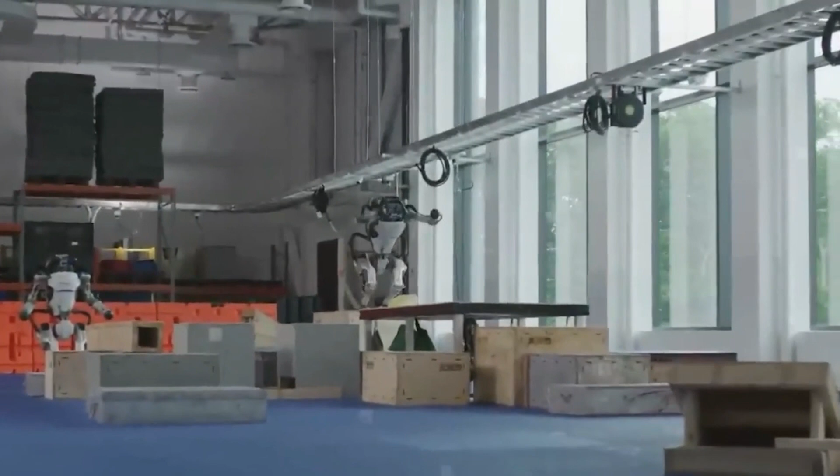I would have expected it to come from a company like Boston Dynamics first. While Boston Dynamics might be using hydraulic actuators or fully electric systems, the G1's movement capabilities suggest it's going to be able to handle a huge range of tasks that we might not have even considered yet.

Another thing that really impressed me was the robot's stability when taking impacts. Now, I'm not saying we should go around punching robots—that might not end well if they decide to rebel against us down the line—but in all seriousness, the fact that this robot can take a solid hit to the chest and remain completely stable is a remarkable feat of engineering. In real-world applications, robots might encounter things like wind, debris, or unexpected collisions, and being able to stay upright and keep functioning in those situations is hugely important.

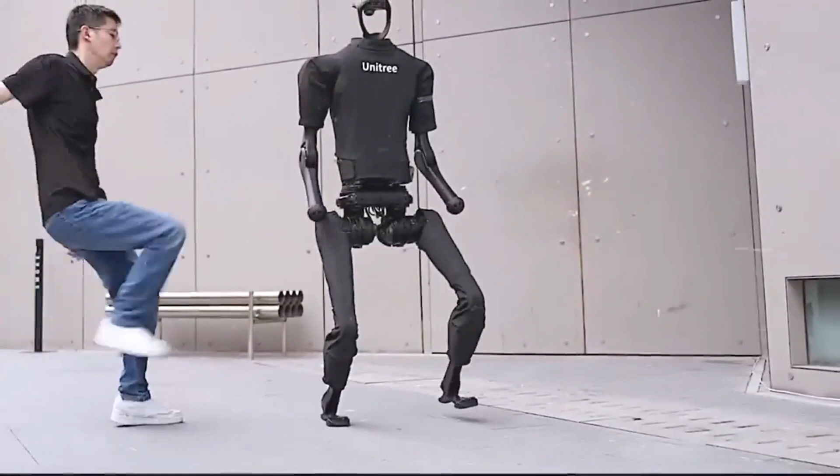Most humans would probably hit the ground if they took a punch like that, so this is a really exciting development. We've seen similar demonstrations of stability from Unitree before with their H1 robot, but the G1 takes it to a whole new level. If you tried this with most other humanoid robots on the market, they'd topple over in an instant. The fact that Unitree has achieved this level of stability without even using external support cables is mind-blowing.

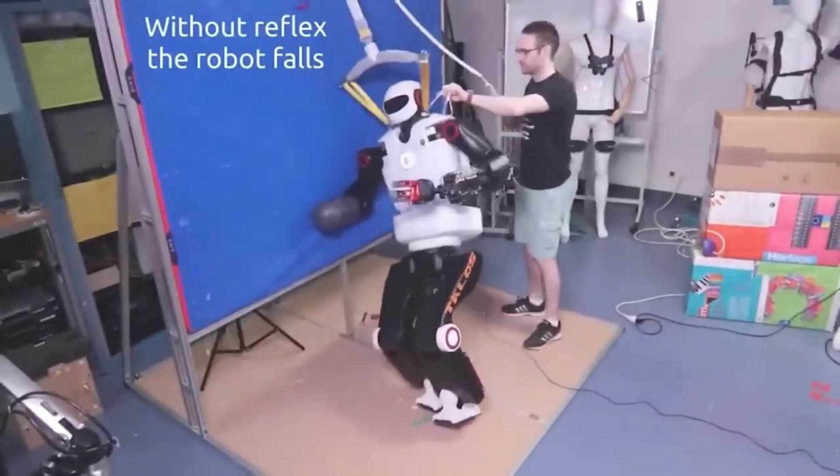Usually in these kinds of robotics demos, you'll see the robot tethered to the ceiling or something to prevent falls, because balance is one of the biggest challenges in the early stages of development. But Unitree has created a robot that can take a beating and stay on its feet with all the wiring hidden internally. That's a massive accomplishment.

We haven't seen anything close to that from other humanoid robotics companies. The Tesla bot, for example, can walk pretty smoothly, but it's not moving nearly as fast as this. And I can't imagine they'd be too eager to have someone kick it around to test its stability. So in terms of overall performance, I'd argue that the Unitree G1 is probably one of the best humanoid robots out there right now.

One of the things that absolutely blew me away was the robot's ability to learn tasks through simulation and then apply them in the real world. Using imitation and reinforcement learning, they can train the robot to perform complex actions in a simulated environment like NVIDIA's Isaac Sim, and then transfer those skills to the physical robot.

Watching it move, you can see how precise and subtle the joint movements are, and the fact that it can maintain its balance while performing these tasks autonomously is staggering.

This has huge implications for robotics research because until now, most humanoid platforms have been really expensive, which makes them hard to access for a lot of labs and universities. The Unitree H1, for example, was a great research platform, but its high cost was a big barrier. With the G1 coming in at a lower price point, we're going to see a lot more people getting their hands on this tech and pushing the boundaries of what's possible.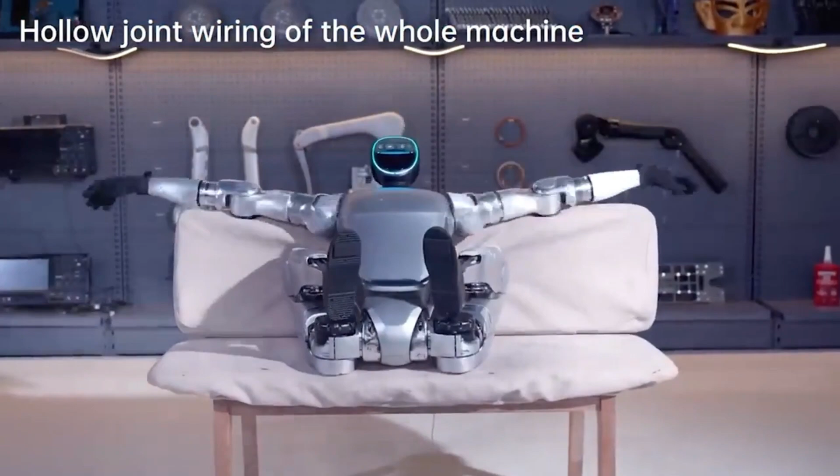And then there are the hands. Previous Unitree robots were criticized for their lack of dexterous manipulators, but the G1 has hands that can grasp and manipulate objects with incredible precision. It can crush a walnut, flip a piece of bread, and even pop open a soda can like it's nothing. The level of control and fine motor skills on display here is just insane.

They also mentioned something called the Unitree Robot Unified Large Model, which seems to be some kind of AI system that allows the robot to perform these tasks autonomously. There aren't a lot of details available yet, but I'm guessing it's a machine learning model that's been trained on a huge data set of simulated and real-world interactions. As more information comes out, I'll be sure to update you all.

One of the other key things they demonstrate is the robot's ability to perform very precise movements, like soldering electronic components. This opens up a whole new range of potential applications in fields like manufacturing and assembly.

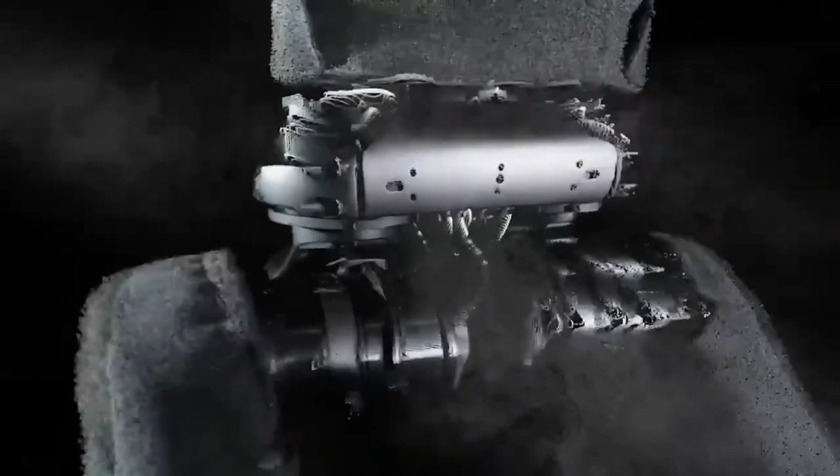But perhaps the most exciting thing about the G1 is its price. At just $16,000 for the base model, it's nearly 10 times cheaper than Unitree's previous humanoid robot, which was listed at around $150,000 to $100,000.

That's a massive leap in affordability, and it's going to make this technology accessible to a much wider range of researchers and developers. We've already seen some of the incredible things that people have been doing with Unitree's H1 platform.

For example, researchers at ShanghaiTech and MARS Lab recently presented a framework for humanoid parkour learning, which allows the robot to navigate rough terrain, jump onto high platforms, leap over hurdles, and more, all using only vision and proprioception. It's a fully end-to-end system, which is a huge accomplishment in the field of robotics.

The problem is that a lot of academic labs struggle to get funding for this kind of research because they simply can't afford the expensive hardware. But with the G1, we're going to see an explosion of new projects and discoveries. I mean, the H1 could do a full backflip, which is just mind-boggling for a robot with such basic actuators. Imagine what people are going to do with the G1's advanced capabilities.

So, to sum up, the Unitree G1 is an absolute game changer. Its combination of flexibility, stability, dexterity, and affordability is unparalleled, and it's going to open up a whole new world of possibilities in the field of robotics. I cannot wait to see what researchers and developers do with this platform once it starts shipping in the next few months.

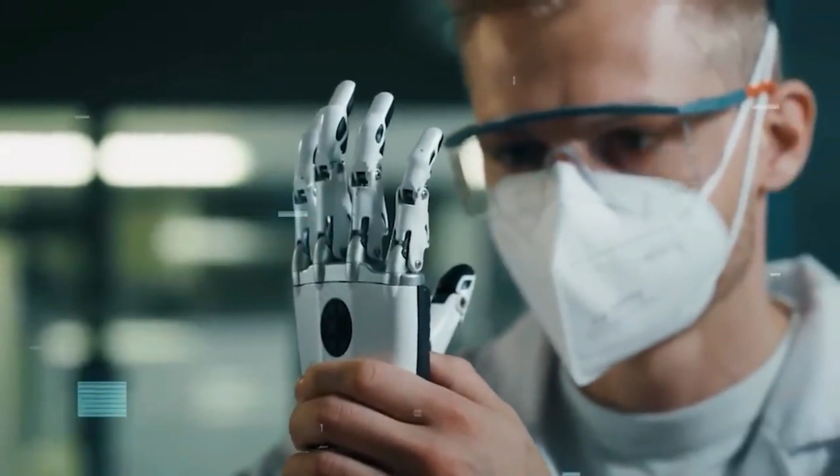The robotics race is heating up, and Unitree has just shown that China is a serious contender on the global stage. They're innovating at an incredible pace, and they're making this technology accessible in a way that no one else has done before. So keep an eye on Unitree. I have a feeling we're going to be seeing a lot more groundbreaking developments from them in the very near future.

Now here's some interesting news from the United Arab Emirates. This announcement comes from Abu Dhabi's Technology Innovation Institute, also known as TII. They've launched the Falcon 2 series, featuring two impressive models, Falcon 2 11B and Falcon 2 11B VLM. Falcon 2 11B is, as they say, a super powerful text-based AI designed to understand and generate human-like text. Meanwhile, Falcon 2 11B VLM is a vision-to-language model. This means it can take an image and generate a detailed text description of it.

Let's talk about why the UAE is making such big moves in AI. Known for its vast oil reserves, the UAE is now pouring massive investments into artificial intelligence. This shift hasn't gone unnoticed. In fact, US officials took note last year, issuing a strong ultimatum for the UAE to choose between American and Chinese tech. In response, Emirati AI firm G42 cut ties with Chinese companies, paving the way for a whopping $1.5 billion investment from Microsoft. This strategic pivot was carefully coordinated with Washington, showcasing the UAE's serious commitment to advancing in the AI space.

The release of Falcon 2 comes as countries and companies worldwide are racing to develop their own large language models. And while some companies keep their AI tech proprietary, others, like the UAE's Falcon and Meta's Llama, are going open source. Looking ahead, the UAE's substantial investments in AI are positioning the country as a significant player on the global tech stage. The Falcon 2 series is just the beginning, with the anticipated Falcon 3 already in the works.

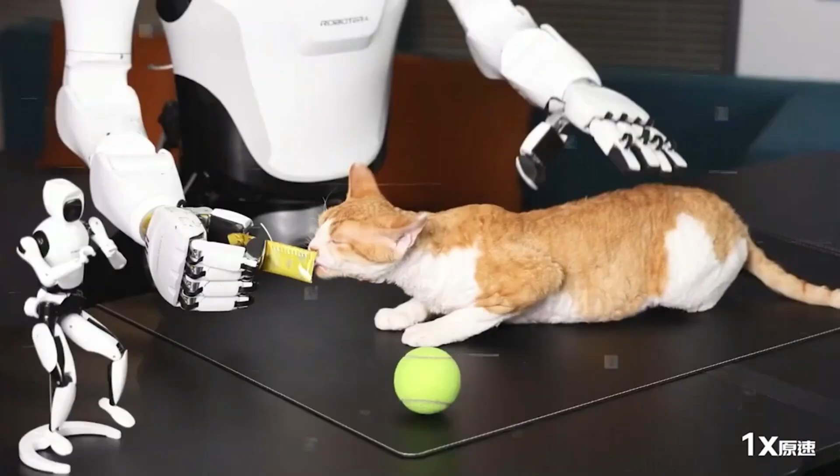So it has 12 active degrees of freedom, which means it can move and bend in all sorts of ways, just like human bodies. It's also got built-in tactile sensors, so it can actually feel and sense things it touches. And the control precision is supposed to be top-notch, allowing for smooth and reliable movements.

But here's the kicker: Robot Era claims that the technology behind X-Hand is fully self-developed, which is pretty impressive for a relatively new player in the robotics and AI game. They were only founded in 2023, but they're already pushing the boundaries of what's possible.

Now, we don't know how much this robot is going to cost or when it'll be available to the public, because Robot Era is keeping those details under wraps for now. But from what they've shown us, it looks like X-Hand is specifically designed to embody AI, which could be a big deal as we get closer to achieving AGI.

And speaking of AGI, there's been a lot of hype lately about it potentially happening sooner rather than later. I'm not even joking around. Some experts are saying we might be on the verge of a breakthrough in this field. Now let's talk a bit more about Robot Era and what they've been up to.

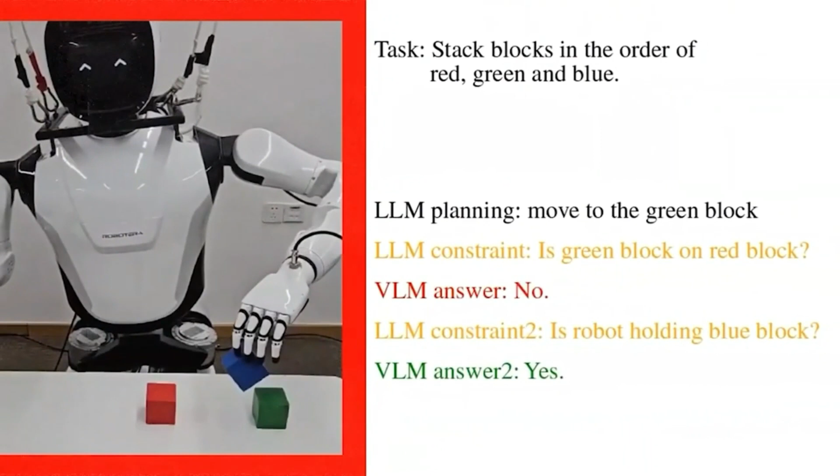They're focused on developing general-purpose humanoid robots, which is pretty ambitious stuff. One of their main projects is called Humanoid Gym, which uses reinforcement learning to train robots to perform tasks in a way that mimics human capabilities. They're using this cool concept called zero-shot sim-to-real transfer, which basically means they can train the robots in a simulated environment first and then deploy them in the real world without any additional training.

But enough talking from me. Let's check out this X-Hand robot in action and see what it can really do. Robot Era has released a showcase video, and I've got to say, the capabilities they're demonstrating are pretty fascinating. Let's roll that footage and see what this bad boy can do.

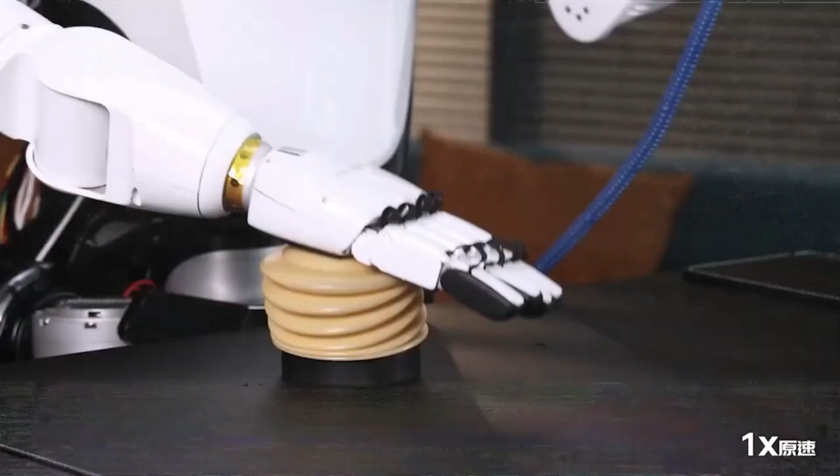You might remember a little while back when I covered Robot Era, that ambitious startup that unveiled their crazy dexterous X-Hand AI robot. Well, they just one-upped themselves in a major way by becoming the first company ever to have a full-size humanoid robot walk on the Great Wall of China.

So their latest robot, called the Xbot L, conquered one of the most iconic and challenging landscapes in the world, the ancient stone pathways and steep stairs of the Great Wall of China. This is a huge milestone not just for Robot Era, but for humanoid robotics as a whole.

So, a 5'5", 165 centimeters tall robot, looking kind of like a slimmed down Terminator, marching its way across those uneven century-old stone surfaces without faltering. It was waving hello, practicing kung fu moves, climbing up and down stairs, the whole 9 yards.

And to be honest, the Great Wall is no walk in the park, even for us humans. Those paths are cracked. The stairs are crazy steep with no railings. There are random potholes everywhere. It's an obstacle course designed to trip up any bipedal robot.

But the Xbot L handled it all with surprising ease thanks to Robot Era's advanced perceptive reinforcement learning algorithms. Basically, this robot can actually perceive and make sense of its environment in real time using sensors and AI. It can identify obstacles, changes in terrain, and literally adapt its walking gait and balance on the fly to deal with whatever the Great Wall throws at it.

According to Yue Shi, one of the co-founders, their perceptive reinforcement learning tech gives the Xbot L something like human-level awareness and decision-making capabilities in unfamiliar environments. The robot can essentially think for itself about the best way to navigate complex areas safely and efficiently.

And we're not just talking about some basic pre-programmed motions here. The Xbot L was climbing rugged castle stairs, dealing with slopes and inclines, avoiding obstacles, adapting to poor lighting conditions, all without any human guidance or help. It was basically pulling off the kind of adaptive, intelligent, situationally aware movement that we associate with people.

Robot Era says this was one of the biggest challenges, developing end-to-end AI algorithms that could translate perceived data from the robot's sensors into precise, stable locomotion in the real world across an ultra-complex environment like the Great Wall. Sounds like they cracked that nut though, based on this demo.

What's really crazy is that this Great Wall feat comes just a couple weeks after they showed off the X-Hand dexterous robot I mentioned earlier. Between these two products, it's clear Robot Era is going all in on embodied AI, building robots with human-like physical capabilities to operate in our world.

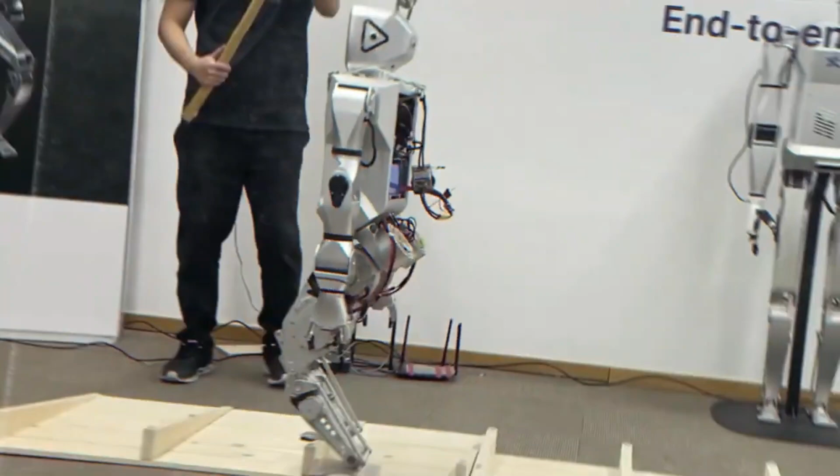Their goal seems to be keeping that competitive edge by iterating and churning out smarter, more capable humanoid robot products at a rapid pace. And they want to keep perfecting ways to transfer all that AI training from simulations into physical machines, enabling those robots to become more versatile in real-life scenarios.

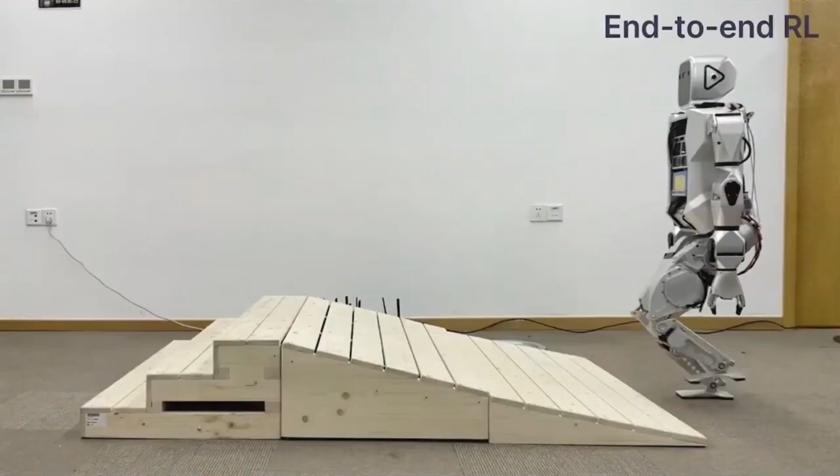The end game seems to be developing ultra-flexible, general-purpose humanoid robots for countless valuable sustainable applications across industries like manufacturing, healthcare, services, and more. I've got to give Robot Era props.

Deliberately putting their robot through the ringer on the Great Wall as some kind of extreme stress test shows serious confidence in their tech. Most companies would avoid something that risky with a brand new product, but the fact that the XBot L could pull it off so smoothly is really impressive.

It's an amazing proof of concept for their embodied AI approach and perceptive reinforcement learning systems working in one of the toughest real-world environments. To me, this demonstrates Robot Era's outstanding core capabilities in fields like robotics, AI, mechatronics, and more. They are clearly at the cutting edge when it comes to embodied intelligence and making it work reliably in the real world.

I'm really looking forward to whatever crazy robot Robot Era comes up with next. If they keep raising the bar like this, they could legitimately help usher in the age of advanced human-like robots that can operate autonomously in our world on an unprecedented level. We're potentially on the cusp of some big breakthroughs in artificial general intelligence, or AGI, becoming a reality over the next few years. And if anyone can build the physical robotic bodies to house and manifest that future AGI, it might just be an ambitious little pioneer like Robot Era.

When it comes to developing super advanced AI systems like AGI, the situation with whistleblowers at OpenAI shows just how high the stakes really are. Robot Era's achievement with their robot on the Great Wall is definitely impressive from an embodied AI perspective, but achievements like that could potentially seem tiny compared to the impacts, both positive and negative, that creating a general artificial intelligence on the same level as human cognition could have on society.